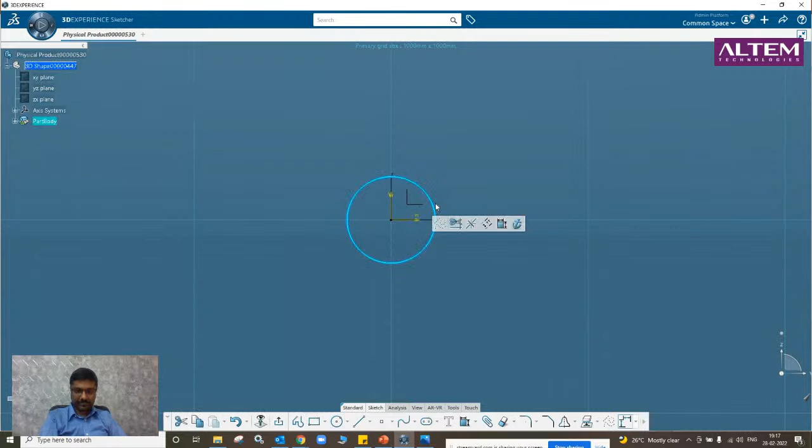Now let us just create a small 1mm circle. If you can see, although I have drawn a circle, it is looking like a hexagon.

Now I will pad it. I will convert it into 3D and pad it by 1mm. And even in the 3D model, it looks more like a hexagon. So how do we change it?

Go to preferences, right arrow mark - don't click on the preferences. Click on that arrow mark here, legacy preferences, and you can go to display performance, and give the value as 0.01.

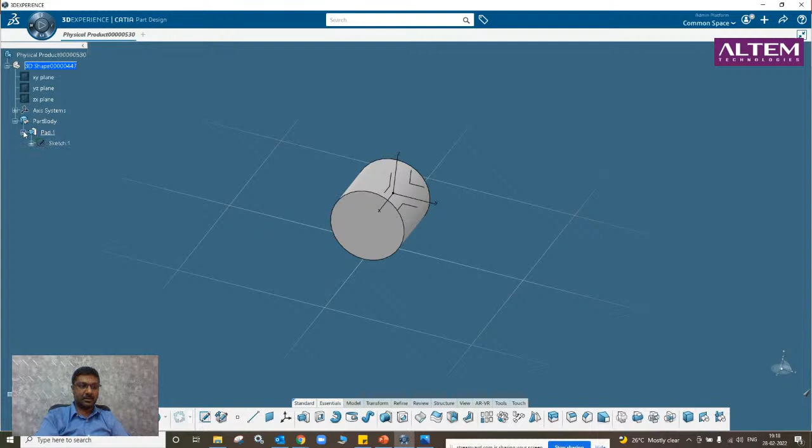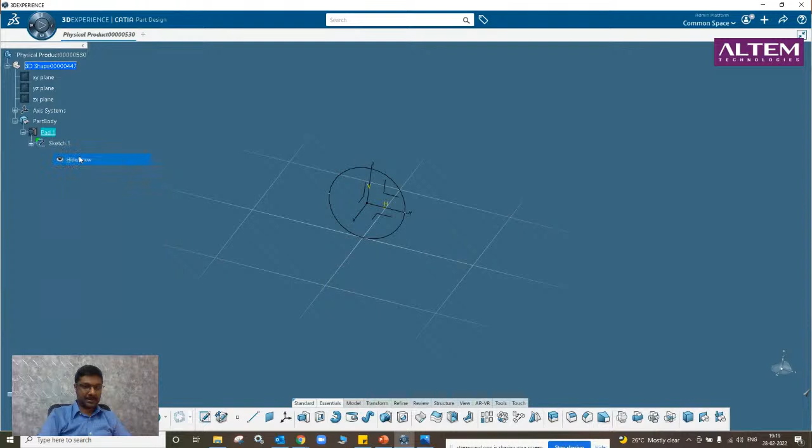Now you can see the circle is looking like a circle, even in 3D. So this is the setting which needs to be done only once - you need not repeatedly do the settings. All the settings will be saved in that particular location. I hope this is clear.

Then for the next settings, we need to go to preferences and go to customize. Here you can move your frequently used favorites design. I am using part design regularly, so what I will do is go to the part design and move it to my favorite section. Then I'll close.

Or else you can drag and drop also - let me drag and drop the part design. So I will open the part design - already it has been opened. Now my part design will be here because this is my favorite apps.

Let me go here, customize. Now let me go to the commands. Let me show you how to create a keyboard shortcut. For example, constraint - let us search for this constraint command.

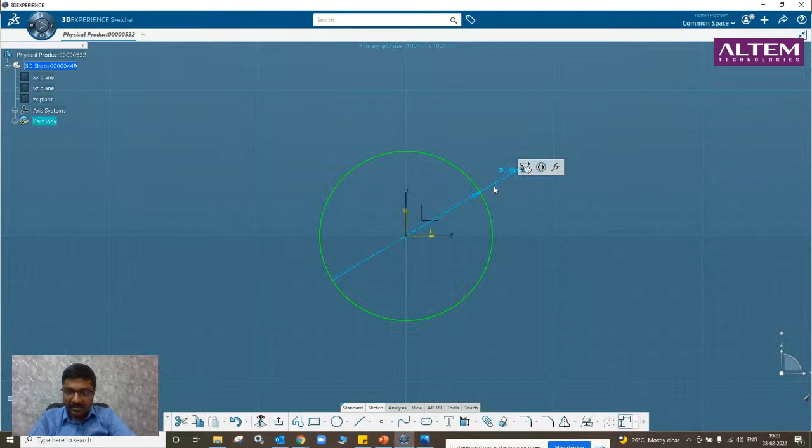I'm not able to find that command. Or maybe I have to open the... just 1 second. Yeah, I have to leave a space here. Maybe if I close the session and open it, you can see that constraint window - this is how you create the shortcut. Maybe if I close the session completely and open it, I think only then it will be visible. So this is how you create a keyboard shortcut.

But there are many other cool things which we can use, which are better than the Windows shortcut. I will share it as the session goes on - you will be able to understand. So whenever we are in the part design, you can check which workbench you are working in. This is the place where you can check which workbench you will be working in.

So without wasting much time, let's get into the sketching workbench today. First you need to click on this positioned sketch. It is there under essentials. Just click on this and you can

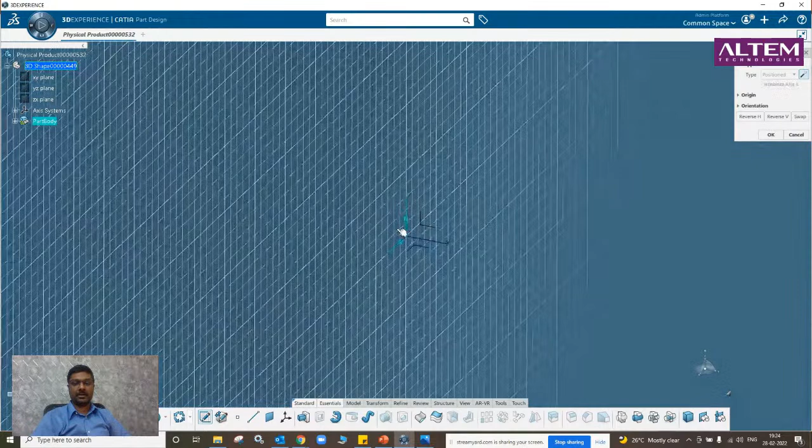choose whichever plane you want, whether you want it the front view, the top view, or the right hand side. Now if I click on the right hand side view, okay,

always we should ensure that vertical is on the top, horizontal is to the right. So just click on this, and it will shift the directions. And then if you want to interchange the directions, like H should become V and V should become H, just click on this swap. So vertical is on the top, horizontal is to the right, and just come out of the sketch. Just left click, and now you are ready to start the modeling.

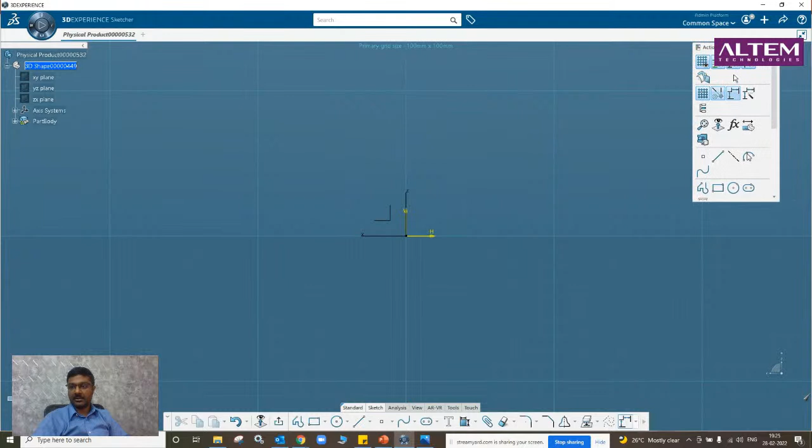Before that, I'd like to show one more nice thing in this. There is something called the action pad. So right click, display action pad. This is like all your commonly used features. You can drag and drop it here, so that you did not search for each and every feature. The commonly used features you can keep here. So just right click on this.

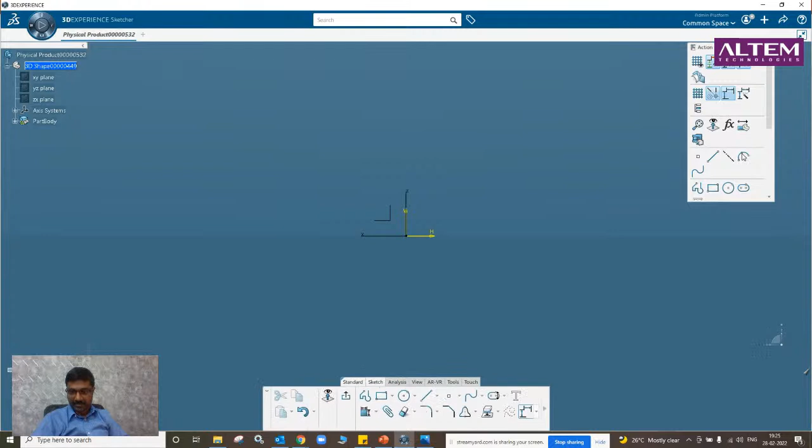Just I will show you how to do it. Right click on this and go to customization mode. You can remove it, or you can say suppose you want to keep it here, you can keep it here. And then right click here and you can exit the customization. So this command, now constraint command, has been put into the action pad.

This is very handy. As I told you, using this action pad and other things which I'm going to show you, it is much better than having a keyboard shortcut. You can work faster. The keyboard shortcut setting is done to accelerate your work, and searching for commands and all of such things can be avoided using these things which are unique to 3D Experience.

And then now, if you want to know what is the name of the feature, right click and you can click on this display icons. Now it is showing it is a rectangle. So if you are new and want to know the name of each feature, you can use this. And once you are experienced enough, or if you are comfortable, you can right click and click on the display icons. That way it becomes very easy.

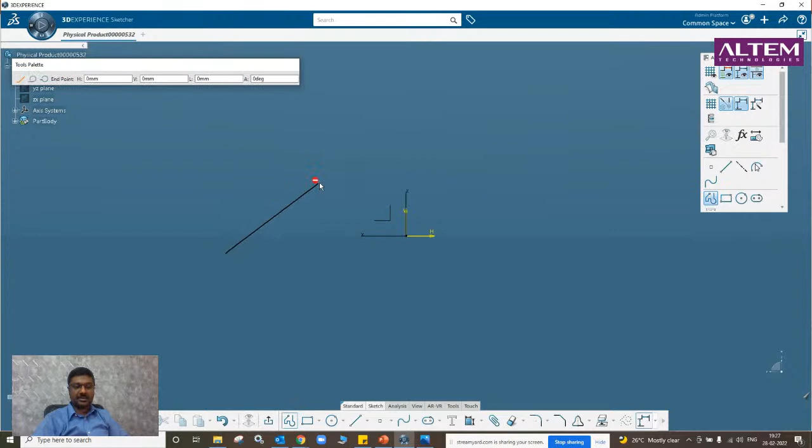Now let us go to the different ways of creating features. First one is the profile. You can just keep clicking on the left hand button, and the profile keeps getting created. And in the end, if you want to close, take it near the endpoint, it will show this close icon, and you can close it. This is the profile, and this is the rectangle with opposite sides, like the diagonal sides, two diagonal edges.

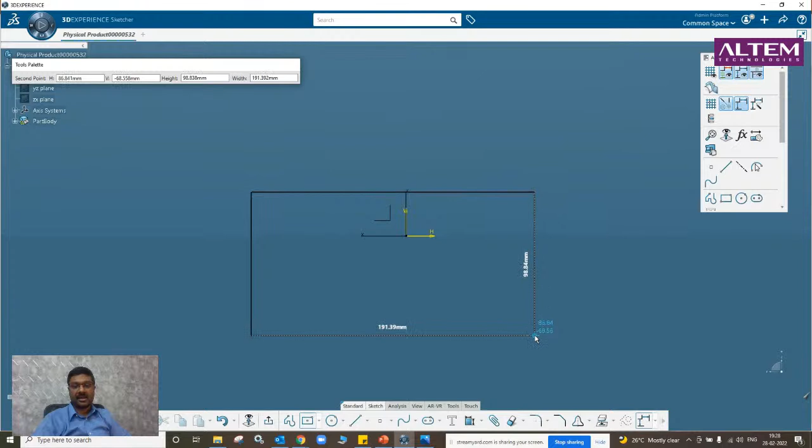If you select, a rectangle is created. Similarly, centered rectangle: just click on this point, that becomes a center, and then you can drag your mouse, and the rectangle is created. Next is the oriented rectangle. Just draw the first line, and then you can move the mouse, so whatever orientation you want, you can get.

Then after this, a parallelogram has been created, and next we'll go to centered parallelogram. I think for this you need a center. We'll explore this later. Next we come to the polygon.

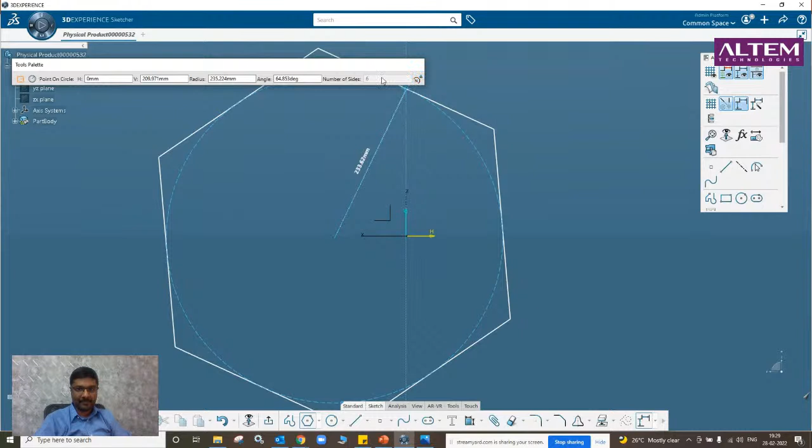By default it will be 6 sides, but you can change it. You can go up to 24 sides. I will create an 8-sided octagon, and this is the octagon. This is how you create a polygon.

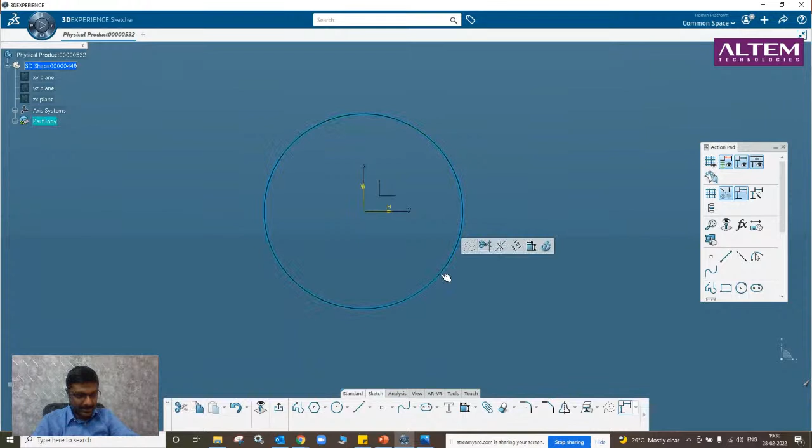Next, we can go to the different types of creating a circle. First one is fairly simple: center, and you can give the radius. After this, you can give a 3-point circle. You can define 3 points on the circumference of the circle, and the circle is created using those 3 points. The circle using coordinates, I think we need to explore that later.

And tritangent circle, I'll draw 3 lines. I will select this tritangent circle: first line, second line, and the third line. So it forms a circle which is tangent to all the 3 lines.

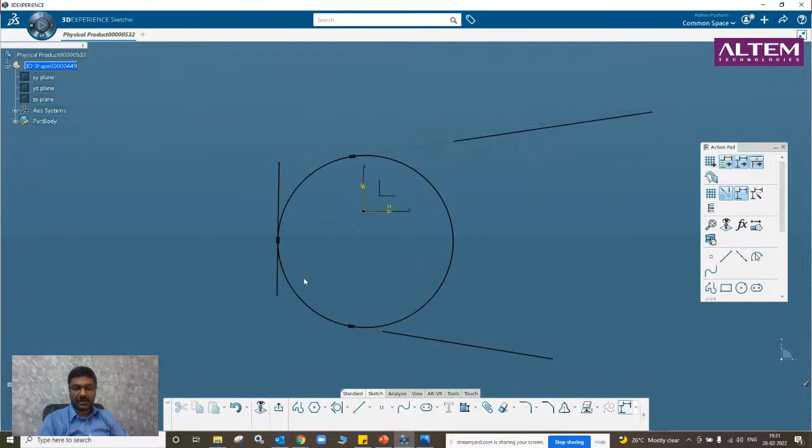Next one is the 3-point arc. This is like first point, second point, and then the third point. This is the way you have to create this. If you use a 3-point arc with limits, then it will be the first point and the last point. These are the two ways how you can create a 3-point arc.

Next one is a simple arc: center point, and one of the points at the circumference of the circle. Then you can drag a percentage of the circle, however much you want to draw, and end it. This is the arc. And this is the ellipse, major diameter and minor diameter. So you can draw an ellipse.

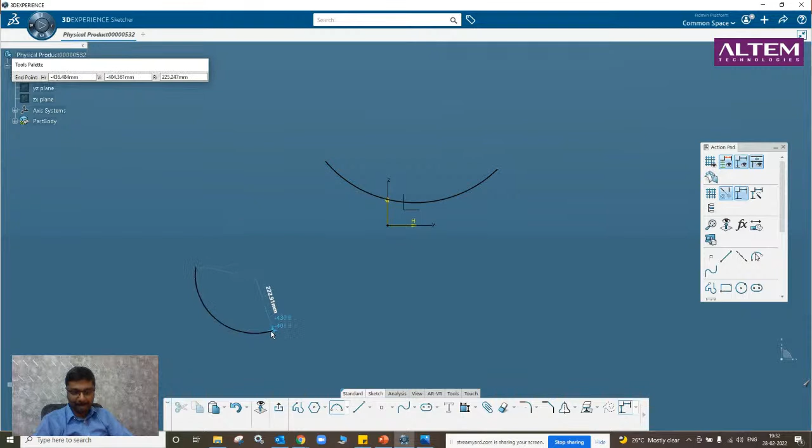Next we will come to this line. Fairly simple, two endpoints and a line is formed. Then you have got infinite line. Then you have got bitangent line. It's very simple. So now this line is tangential with the top curve, and it is also tangential to the bottom curve.

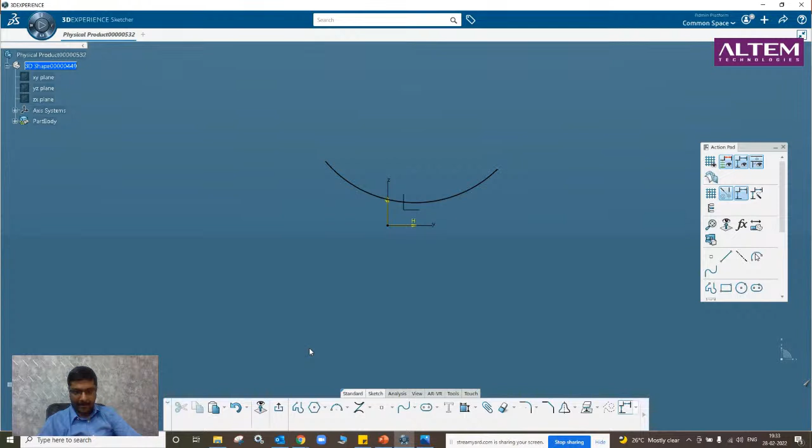Similarly, you can create a bisecting line. Say suppose you have got two lines. Now I will select this bisecting line option, line 1 and line 2. You can see the bisecting line has been created.

Next one is the line normal to the curve. I will take a curve, and I'll select this option of line normal to the curve. You can see this is perpendicular to the curve at that particular point.

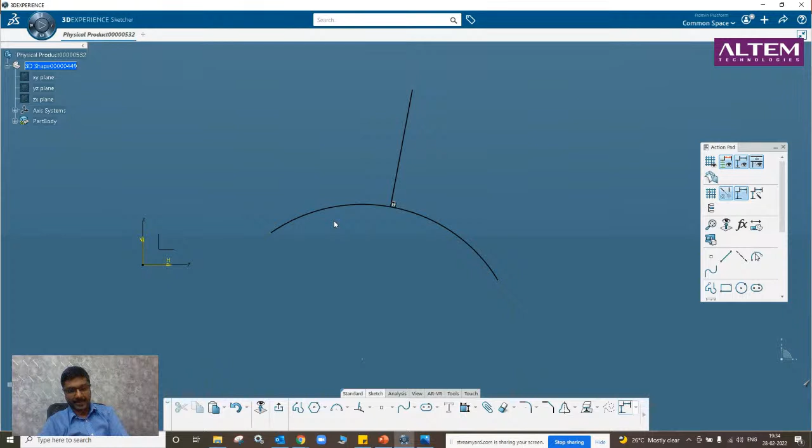The next one is the axis line. Axis line is used as a reference for certain part design commands, which we'll be covering. You'll know the importance of the axis line when we go to the part design.

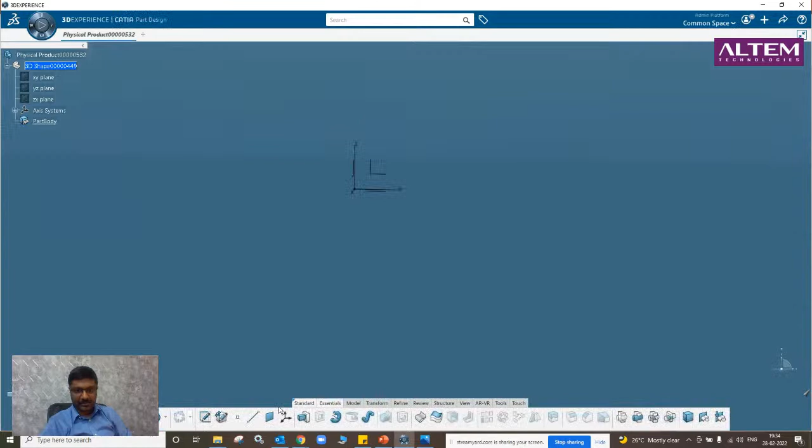Now we'll come out of the sketching design workbench. So the next step is there are three fundamental guidelines of the features. These are like the foundation to the sketching or the design aspect in 2D wireframe: points, planes, and lines. There are different ways to create points, planes, and lines. It is very important for us to know the different ways of how you can create a point, a line, a plane. So this part will be in 3D: creation of 3D points, creation of 3D lines, and creation of 3D planes.

Now if you go under the point, there are multiple methods of how you can create a point. Remember, these are all 3D points. The first one is fairly simple: you want a point at x, y, z coordinates. If you know the coordinates, you can create a point. Suppose say there is a point at x 200, y 100, and z 100. A point will be created. This is the point.

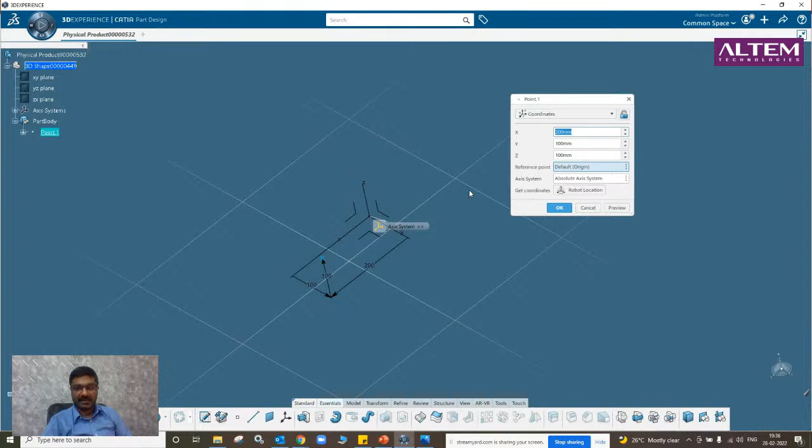If you see the point, and double click on it, you can see this is 200 mm from the x plane, 100 mm from the y plane, and 100 mm from the z plane. So this is fairly simple.

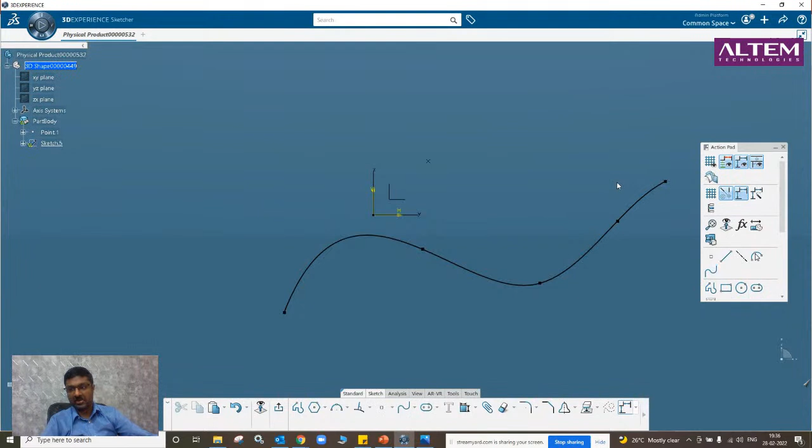The next method of creation of a point is on the curve. So let us create a curve. This is a spline, as you all know. Let me come out of the sketch. Now I want a point on that curve. So you have to go to this point option and create a curve point. Just click on the curve.

Now this is distance on the curve. If you want a point at the center of the curve, just click on this. It allows you to create the curve's middle point. This is the curve's middle point. Or if you want a ratio like 0.25, you can create that. So now the point is created at the center of the curve. Whenever you want to create a point on the curve, you should use this option.

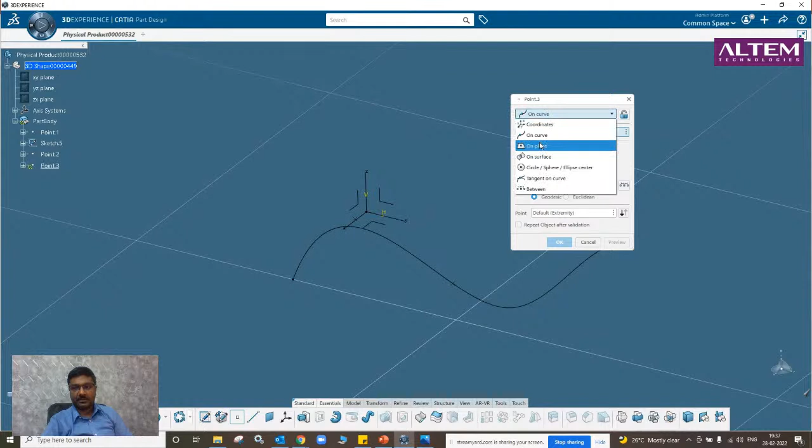The third one is on plane. On plane is nothing but you want to create a point using two coordinates, horizontal and vertical, instead of three, because on a plane one direction is already fixed. So just drag and drop and it will give the H and V value. If you click on it, you can get it.

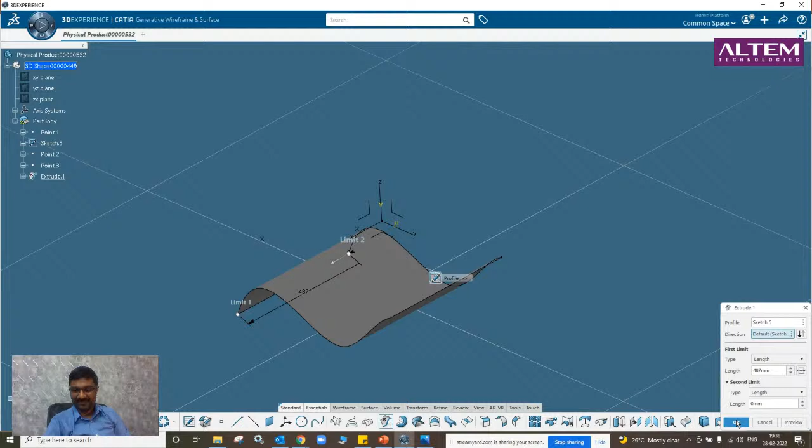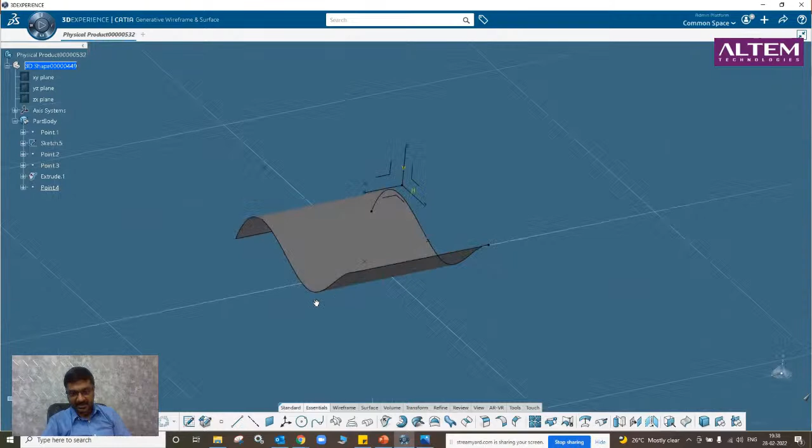And next one is on surface. Now what I will do is go to the surface design workbench, and I will use the same surface to extrude this. Now I want to create a point on this surface, and I will give the distance as 0. Now the point is created exactly at the center of the surface. The point is lying on the surface. So this is how you create a point on the surface.

Let me delete this as of now, and we will cover more on surface design when we are covering the surface design workbench. Now, suppose there is already a circle, I will pad this.

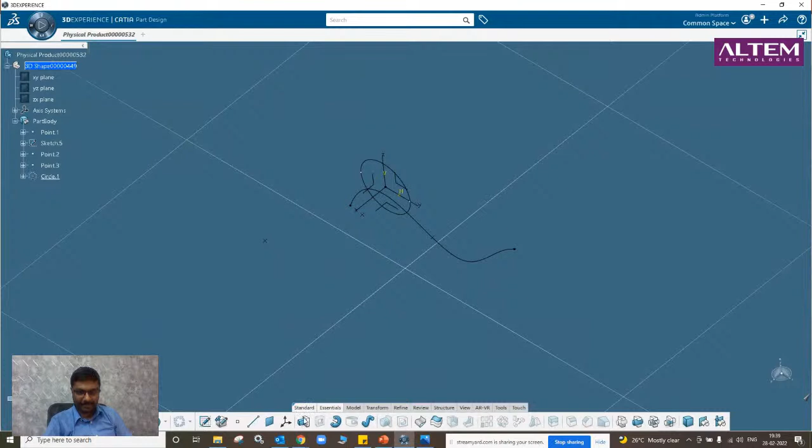And now I want a point exactly at the center of this circle. So what I will do, I'll go on this point, click on circle, and click on this circle. You can get a point exactly at the center of the circle.

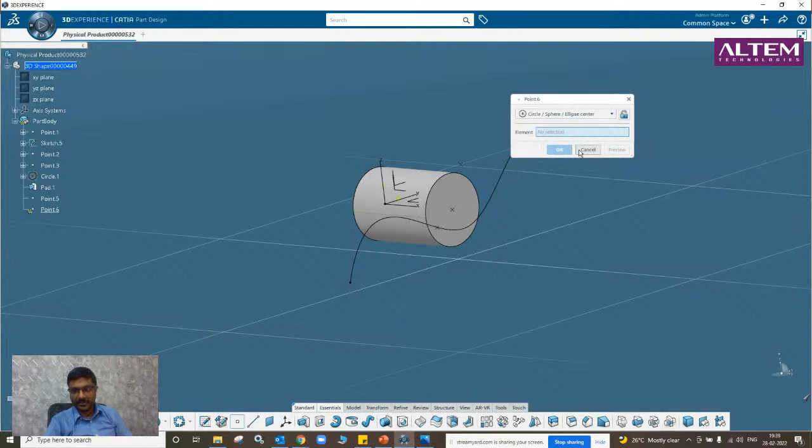In similar manner, we will go to tangent on the curve. This is not very popularly used, it's like one of the rare times you'll use it. I'll take the example of the same curve. I'll click on tangent on curve, select the curve and select this y-axis, tangent direction.

If you click on that, you can see there are two points which have been created, that is, the y-axis is passing tangent to the curve at those 2 points. Now it will ask me whether I want to keep the two sub-elements. I'll keep all the sub-elements, and now there are 2 points which have been found.

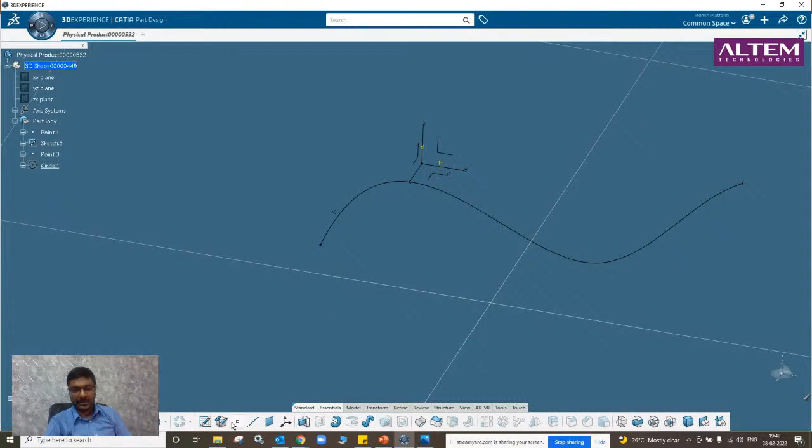And then the last one is in between. So there are 2 points which are here, and I want a point in between these 2 points. I will go between point 1 and point 2. You can create it at the center or whatever ratio is the requirement, and you give OK.

Remember, all this is in 3D, it is not in 2D.

Now let us go to the different options of creating lines. The points, different ways of creating points, is done. Now let us go to the lines. So the first one is fairly simple, point to point. First point, second point, a line is created.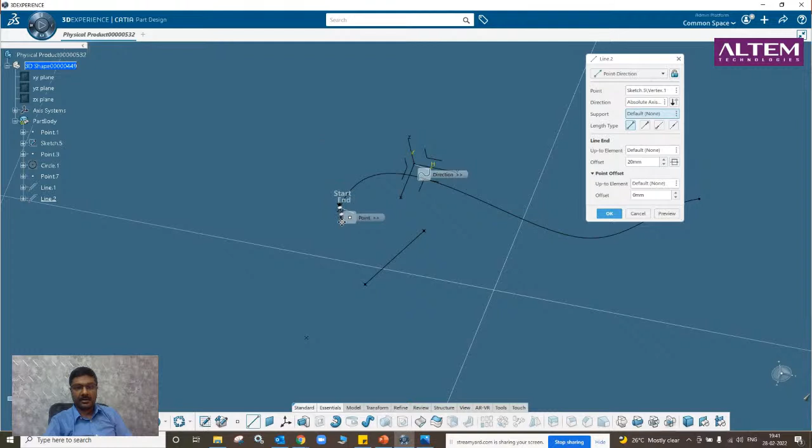Whenever we are going to the second one, point and direction, I will select the point and give the direction. And you can select to increase the length, to maintain the direction, but you will have control over the length.

And next one is angle normal to the curve. I need a point for that, so I'll create a point on the curve, and give angle normal to the curve. So this is the curve and this is the point, and you can give the angle, whatever angle you want.

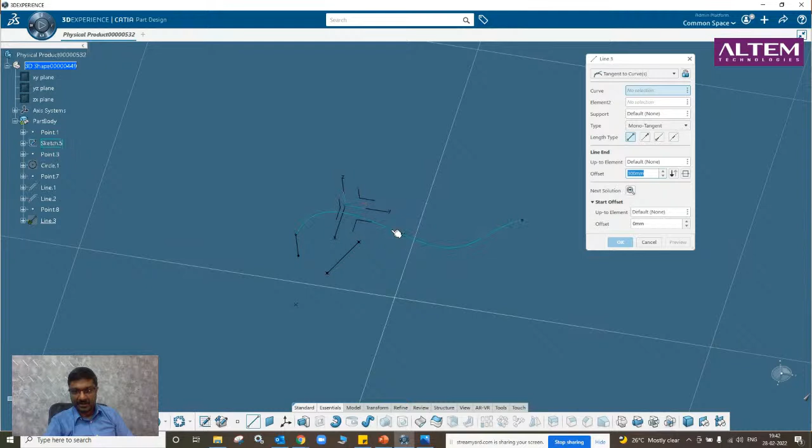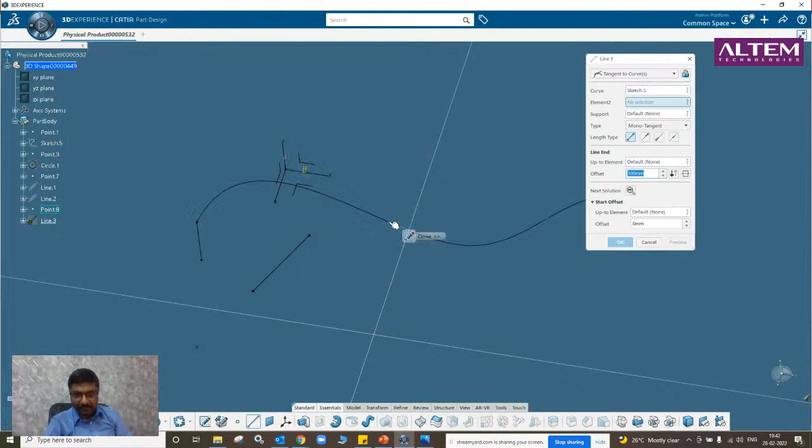So this is angle normal to the curve, and the next one is tangent to the curve. It's a similar option, curve and a point, and the line is tangent to the curve at that particular point. I hope this is clear.

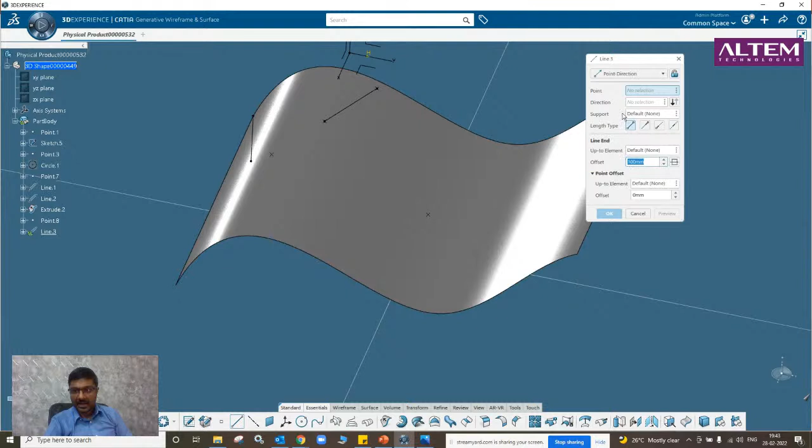So next one will be normal to the surface. Let me go to generative wireframe and surface, and let me extrude this. Let me create a point on the surface, and I wanted the center, so the distance is 0. Let me go to the line, and let me go to normal to the surface and point.

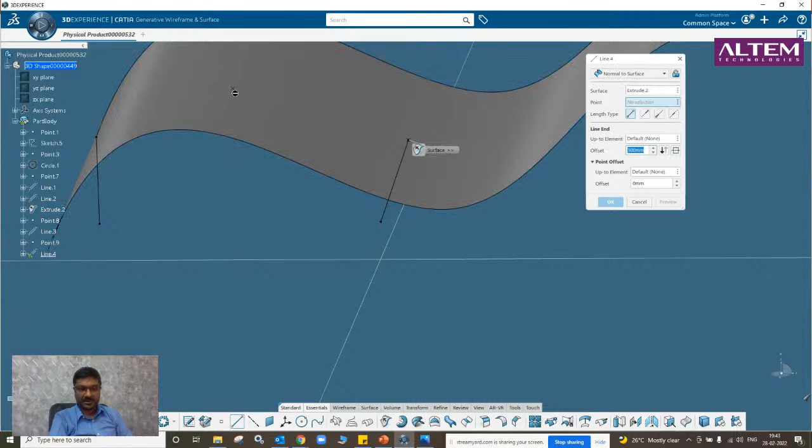It will be normal to the surface at that particular point. So suppose I create a point here, line, normal to surface at the point. Okay, so let me delete this, we don't need it as of now.

Just let me go to the part design workbench, and the last option is bisecting.

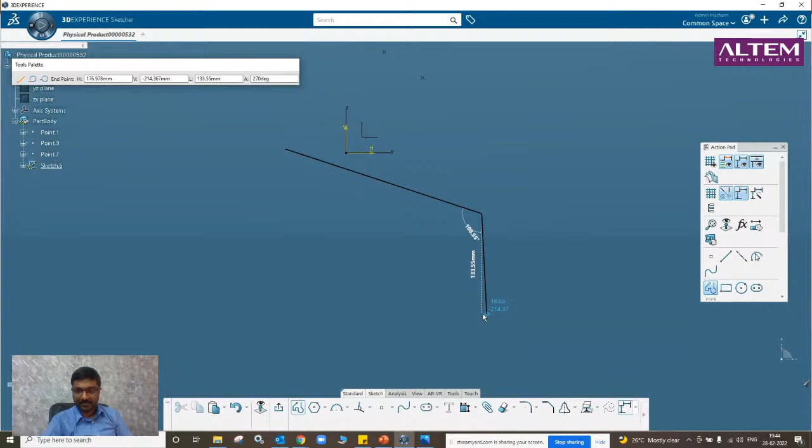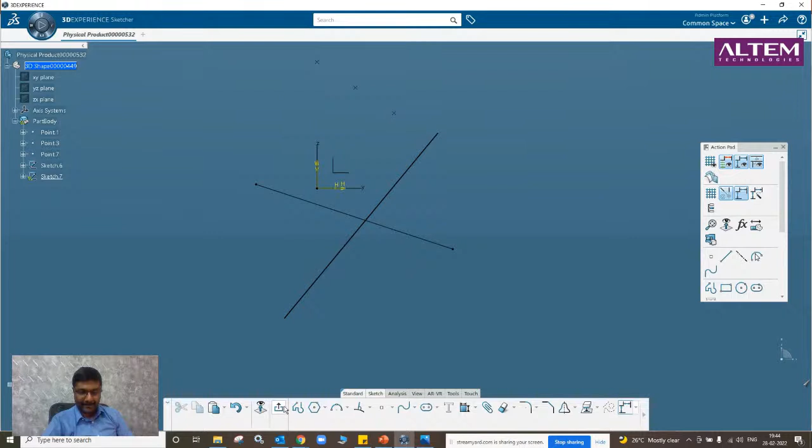Let me create a sketch one. Come out with the sketch. Let me go to one more sketch, and let me draw one more line. Now I want to create a line just bisecting these two lines, line 1 and line 2. See, a line is created at the bisection point of those two lines.

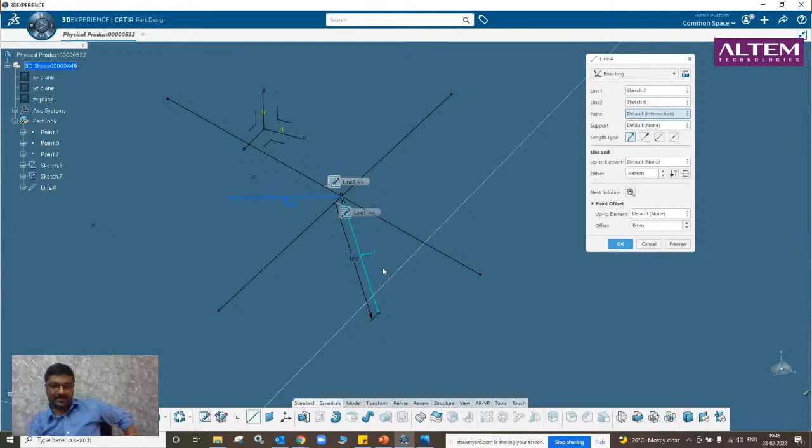Now let us quickly, without wasting much time, create different ways of creating planes. This is also very important.

So the first option is offset from the plane. Already you are having an existing plane, you want to create one more plane, offset. Whatever existing plane, just create an offset plane at a certain distance.

The second option is parallel through point. For example, you're having any point, and you want a plane at that particular point. You can create it, it is asking for the reference. You want the ZX plane to be replicated on that point. The plane is created as a ZX plane.

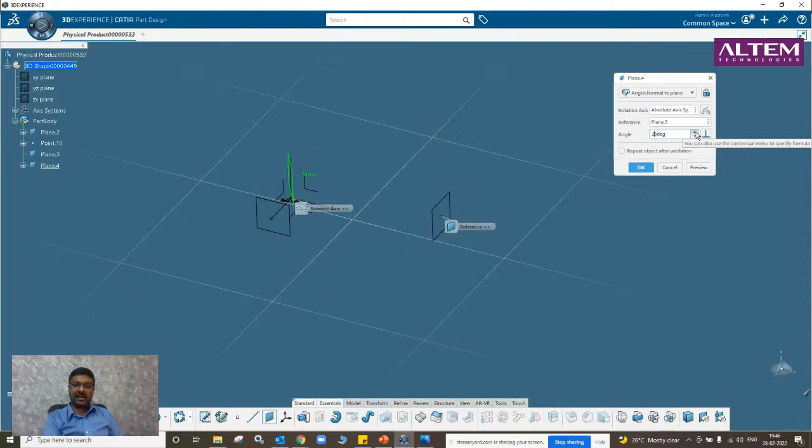And angle normal to the plane. So what I will do, I'll give Z as the rotation axis, give reference axis as this, and you can move the angle. This is to create angle normal to the plane, and you can create at any angle.

Next option will be through 3 points. You must remember that it's like a tripod.

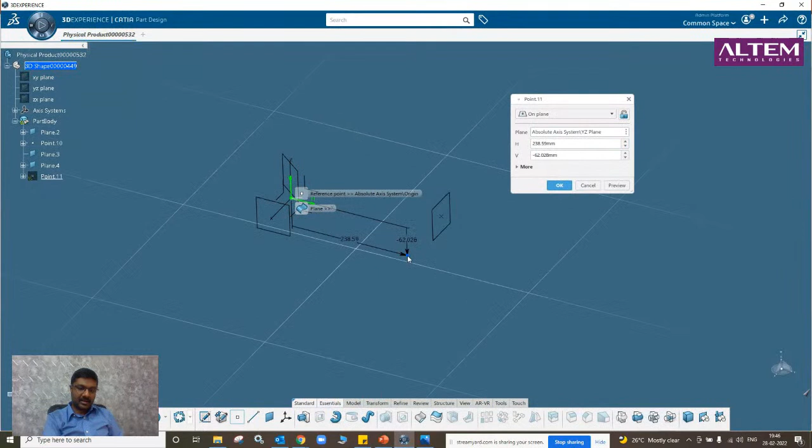This plane is like a tripod. For a tripod to stand stable on the ground, you need 3 points. You cannot have 2 points or two legs. At minimum, 3 legs are required for an object to be stable on the ground.

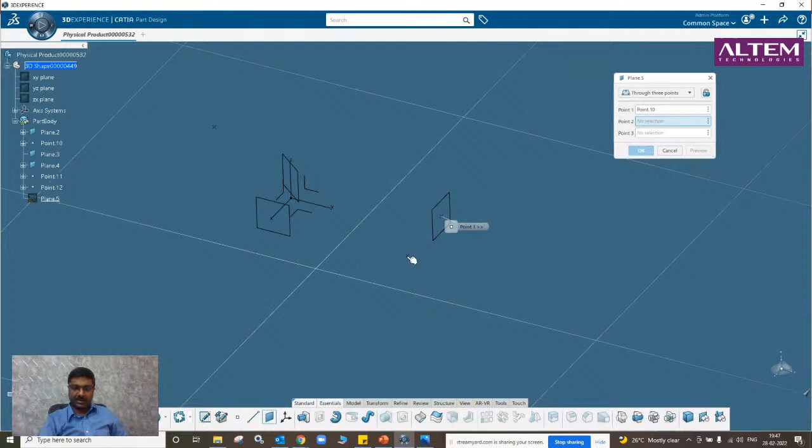Similarly, for any plane, there are 3 points, which is the bare minimum requirement for a plane as an input. With 3 points only, a plane can be created. So what I will do is select the 3 points and give input as 3 points. The point will be created, and the plane will be created on the first point which you select, but it will be passing through point 2 and point 3. Remember, this is a 3D plane we are talking about.

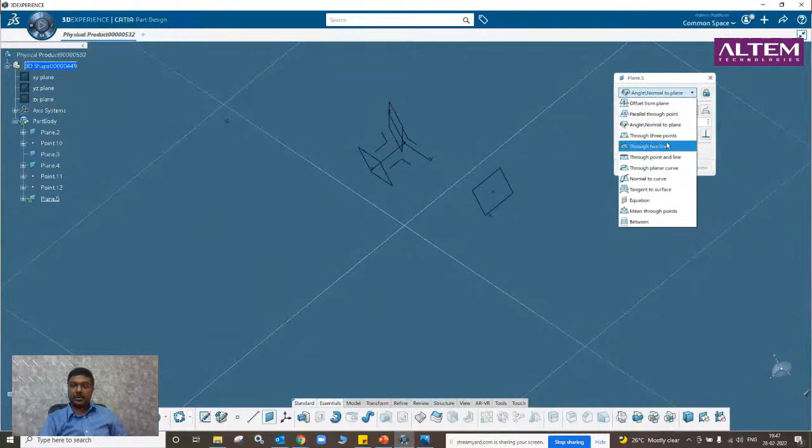Then the next option is through two lines. Similarly, instead of input of 3 points, it can be two lines. So what I will do is create with two lines. The plane will be created on line 1, taking the orientation of line 2.

Okay, and the next method of creating planes is a point and a line. So we need to have a point and we need to have a line.

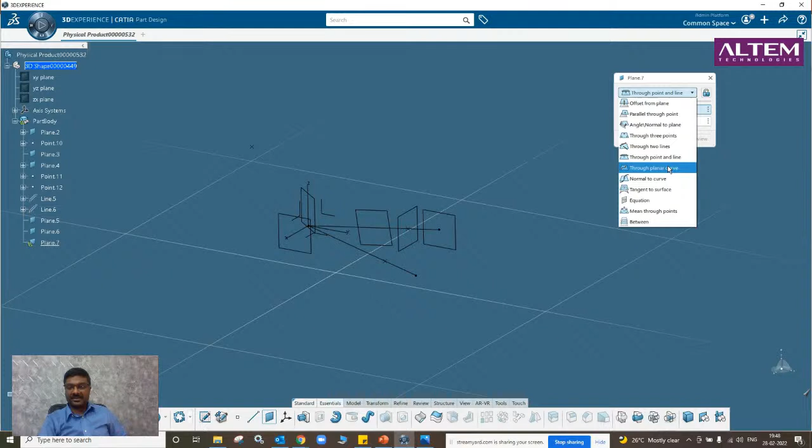And the next method of creation is the planar curve. This is not very important, let's skip this for the moment. Let me delete all of this, close this, and open a new session.

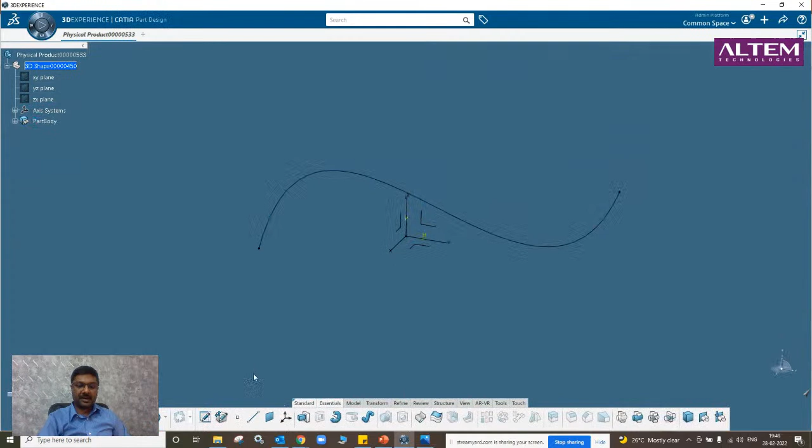Let me create a point on the curve. Now we can create a plane which is normal to the curve at a particular point. Select first the curve, then select the point. So now this plane is perpendicular, or normal, to the curve at that given point.

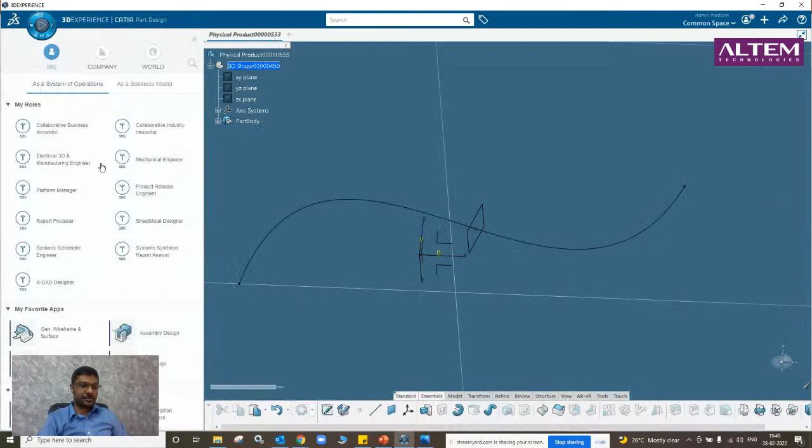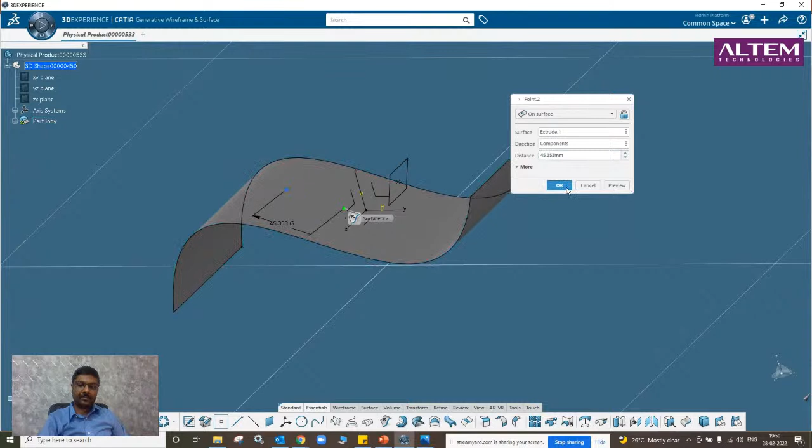Next is tangent to a surface. I will extrude this, then create a point on the surface. Then I will go here and select the option of tangent to the surface and a point. So the plane is created tangential to the surface at that particular point.

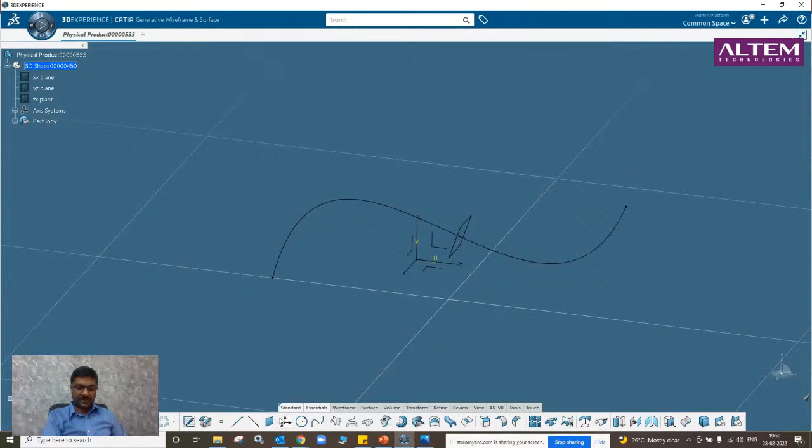Let me delete this. Let us go through the equation and mean through points - we'll skip for now. So let us go to the last option, that is 'in between'. This is a very good and very important option, so let me go through that.

For 'in between', I'll select this ZY plane and the ZX plane. Now if I give it 0.5, this is 45 degrees in between. As you keep changing the ratio, as I keep reducing it, it will try to match the ZY plane. If I give it 1, it will be the ZX plane. So if I want an in-between orientation, I can take it as 0.5, it will be 45 degrees. This is how the in-between plane works.

Now we have gone through different ways of creating points, lines, and different ways of creating planes. So these are all the things which we saw in 3D. Now I think, for better understanding of all the features, let us go through some sketching examples. Just give me 2 minutes.

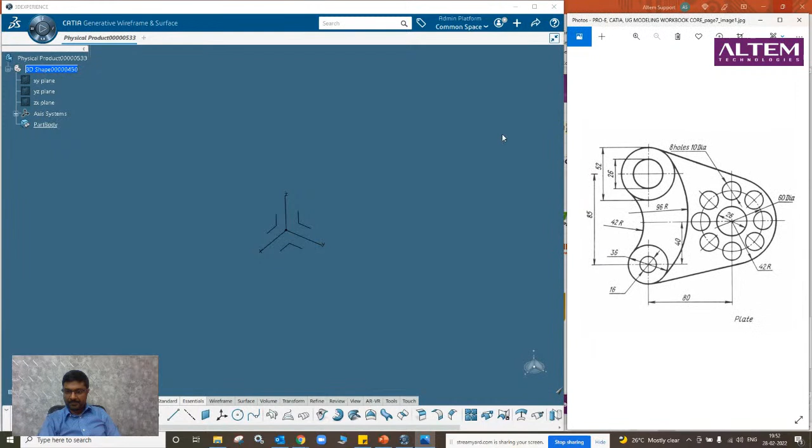I hope this screen is visible to you. Okay, so we will try to do the sketching on the ZY plane. For the moment, I will minimize this action pad. So first let us draw this 26 dia circle. Let us take it as our center.

I'll draw a circle. Now instead of going here and doing everything, I'll just click on this circle. It will give you the possible options. Now what are we trying to do here? We're trying to get the dimension, so it will give you the constraint. Just go here and we can give 26. Okay, now that is done.

Now let me draw one more construction circle, that is of 60 dia, and let me take this as a construction element. Now let me draw one more arc which is of 42 radius.

Let me just draw this now. Later on we can edit it however you want, but the length is 42.

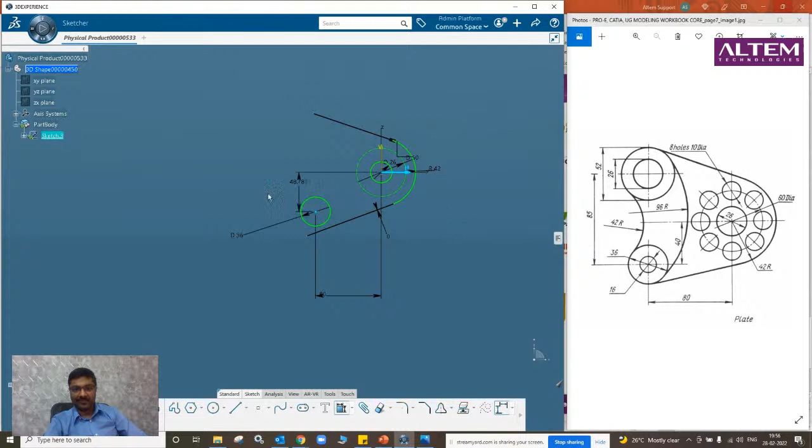Now what I will draw - I will draw one more circle, and I will give the direction of the dimensions. So it is 80 mm from the vertical. What is the circle diameter? It is 36. And I'll fix the vertical dimension as well - vertical dimension is 40. I'll select this circle and right click, value tangents.

Now this is proper. Now I will draw the upper circle also, of diameter 52, which is lying at the same point.

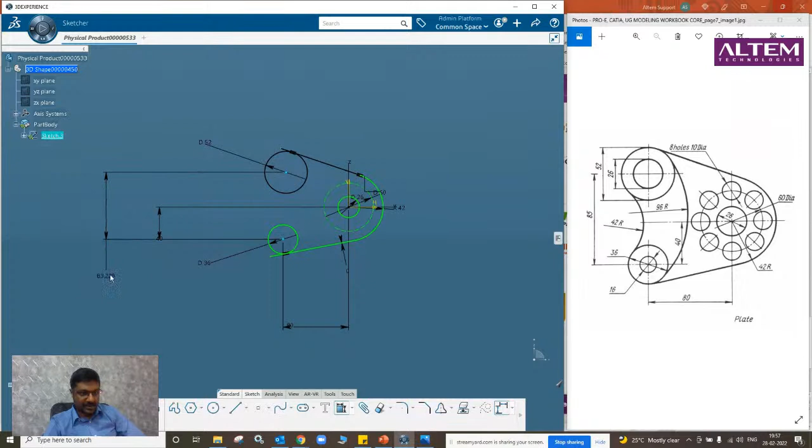Yes, 52. Now I'll select this line, I'll select this circle, I'll click on the constraint, right click, value tangents. Now the distance between the two circles is 85. Select these two points.

Right click, vertical measure, and I'll give this as 85. Now still this is moving, so this one and this one. Horizontal measure is 0, or this is fixed. I will draw one more circle which is 26.

Now I will have to draw an arc which is passing between these two, which is of 96. So what I will do, I will take an arc, just a random arc, and if I just try to move this arc, it will try to constrain with every possible line or the circles. So I will hold shift and then move.

And I will fix this. Okay, this looks to be like 0. And I will take these two and make it tangency, this one and this one. Wait a minute, tangency, it is not allowing. Maybe this is not proper.

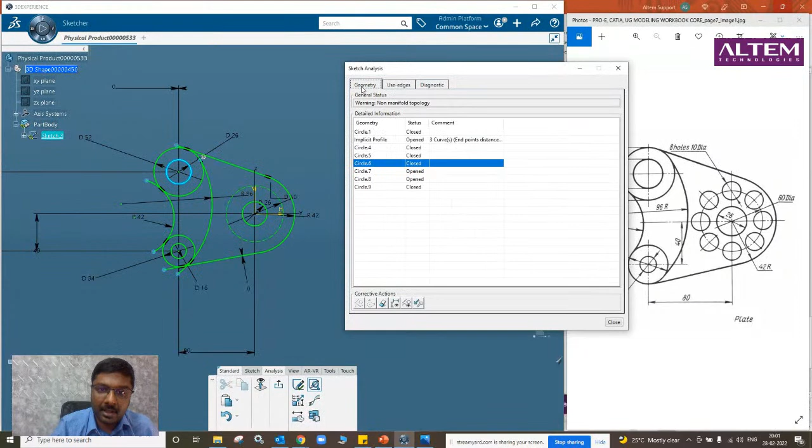Go to the analysis, or there is something called a sketch analysis. In the analysis, go to sketch analysis, and now you can see, okay, all these things are undefined. This circle is open, this circle is open. So how do we close this and how do we check it?

For this there are useful commands which I'm going to show you now. Just a minute. Oh, this is the thing. Sorry, so there is something called quick trim and trim. Let us see what is the difference.

Quick trim is nothing but, now as you can see, this is extra. I'll just click on this and, like an eraser, whatever is extra is getting removed.

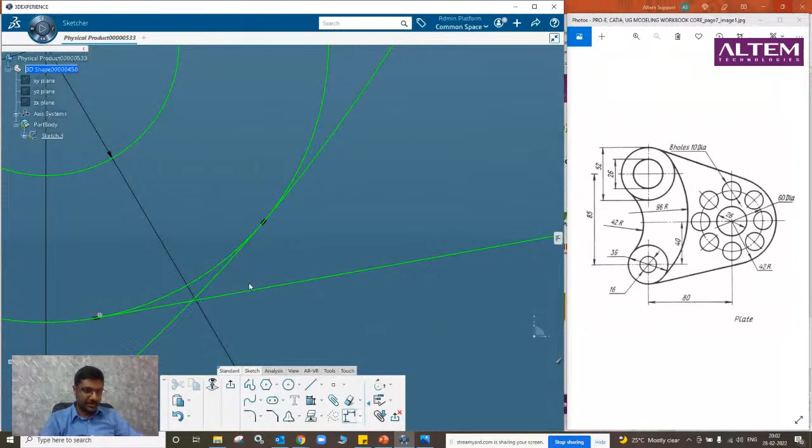Now we had to do the trim twice. We have to trim this and trim this, or else there is something called trim. So just select this and select this. But so this is how you must... now this is correct. In the similar way, either you can use trim or quick trim.

Now I think everything is clear, but this cannot be converted into 3D, because this is not closed. This is not implicit profile. This is not a closed profile. We have to delete these two to get it.

Okay, forget it, now we are trying to work in the sketcher design profile. Let's concentrate on this. Now we need to draw 6 more circles, or sorry, there are 8 holes. What is the diameter of each hole? It is 10 diameter. I'll create one circle which is 90 degrees to this.

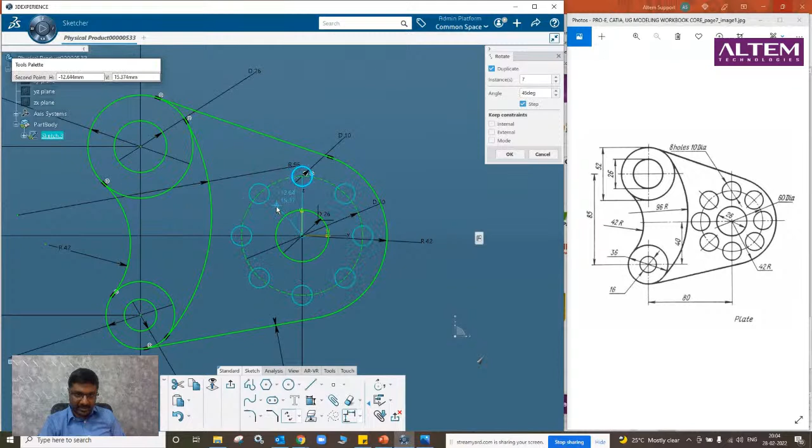And I will select as 10. Now I need not draw 8 individual circles. I can draw this one circle and do a circular pattern. There is something called rotate, and there is something called duplicate. You need 7 instances, I'll click on 7, and I will select the first point and the second point, and just move. They are created.

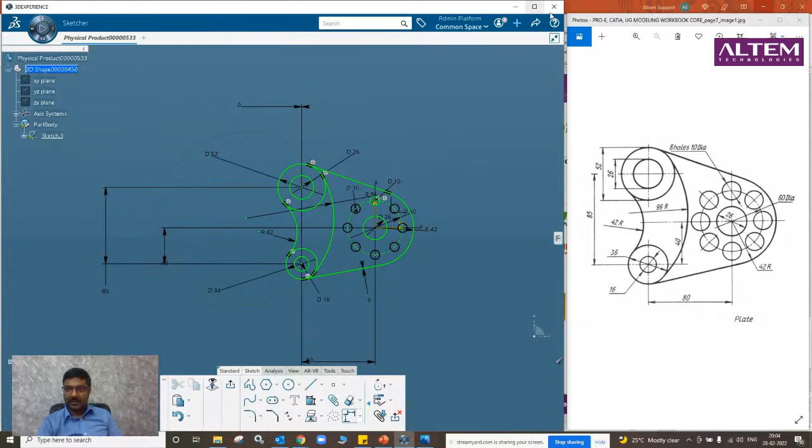But unfortunately, it won't be auto constrained. So you have to give diameter to each of it to constrain, or you have to constrain with H and V when you are using the translation. All this mirror, scale, rotational, all these commands - if you are using them, it won't get constrained automatically. You need to again constrain it individually. This is one of the examples. Let me go through one more example very quickly.

Okay, so let us get into the sketcher design workbench. We minimize the action pad for as of now. So for creation of the bottom part, I will use a command called cylindrical elongated hole.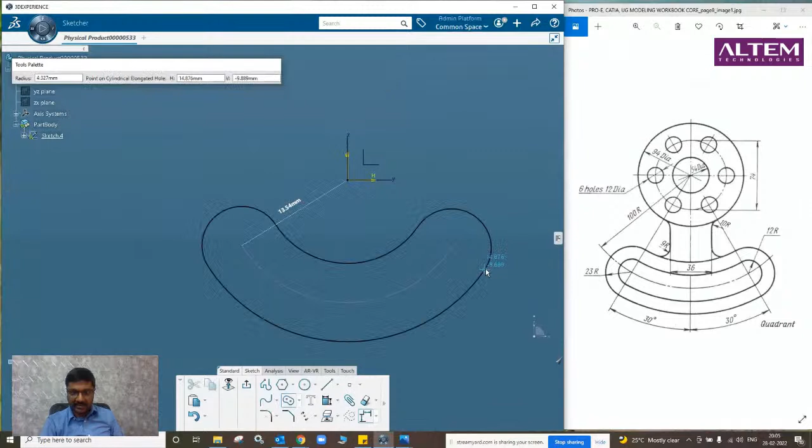I will select the center point, two ends of the arc, and then move my mouse. The arc is 12, so I'll give dimension as 12. Now it has turned into green because I've already constrained this. Now the next one, it is 23R. I'm sorry, this is 23R.

And the inner one, this is 100R. I'm sorry, this is 100. And this one is 23.

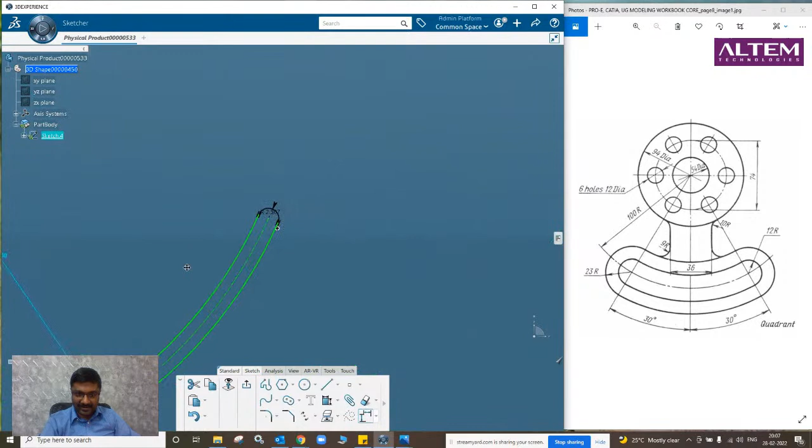This is 23, and there is one more keyhole profile which is of 12R. So what I will do, I'll take one more keyhole with the same dimensions, and this one I will give as 12.

And I will add two lines, and this angle is given as 30 degrees.

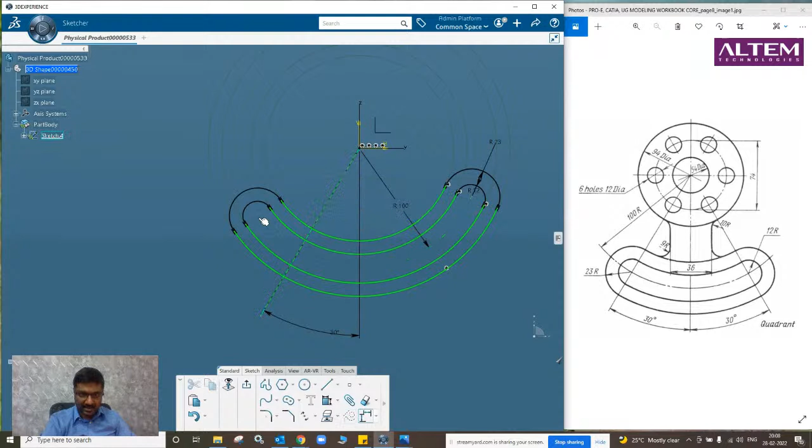I will have to first make this line as a construction line, and give this distance as constraint. Similarly, instead of drawing one line, I'll mirror this line, as you can see it is trying to. So what I will do is mirror this.

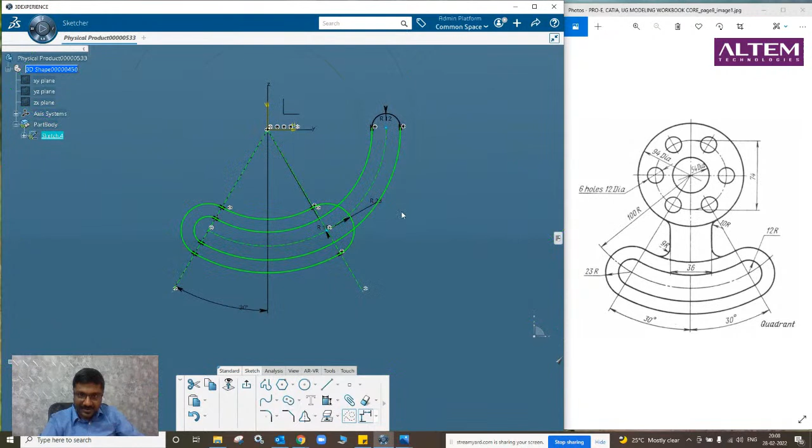Just going to this, and I will give constraints. This and this constraints. Okay, this is how I draw the bottom part of this.

Then I will just go on to the top one. The diameter of this is 94 dia. The inside circle is 54 dia. And there is a 74 dia circle.

I will make this as construction, and I will draw one circle of 12 dia.

And now I will rotate this. I need six or five more instances, and center, center, and there you go.

That's it, and you need one more line. The distance between the two lines is 36. So randomly I will draw one line, press shift, and draw a line. Make this line as vertical, and I will mirror this line. Now I'll get the distance as 36.

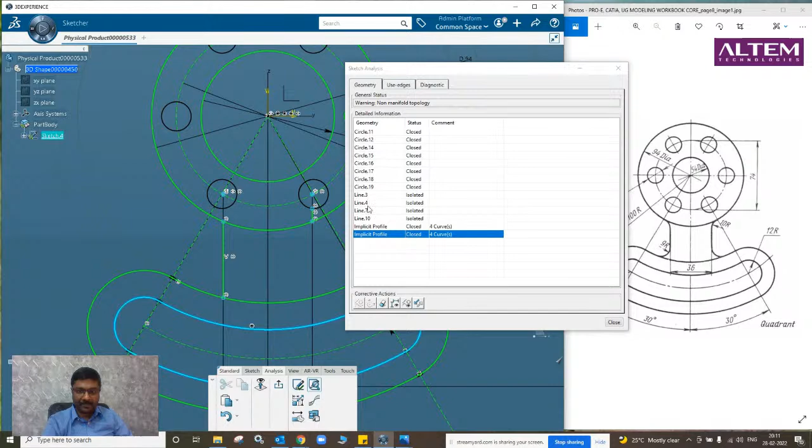I will show you where it will reflect. Now if you go for sketch analysis, it is showing that there are two lines which are isolated. So this is how you can find out if there are any unnecessary lines or points.

Sorry, something is wrong. Let me mirror this line. And distance between this line is 36.

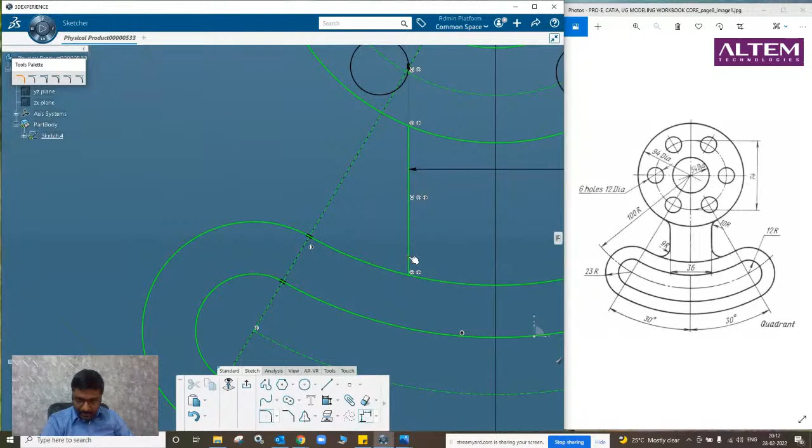And now I have to give the 9R and the 10R. So what I will do, there is something called as corner - just select the two ends and give it as 9. That is how you give the radius. If you want to give this one as 10R, just select this and give it as 10.

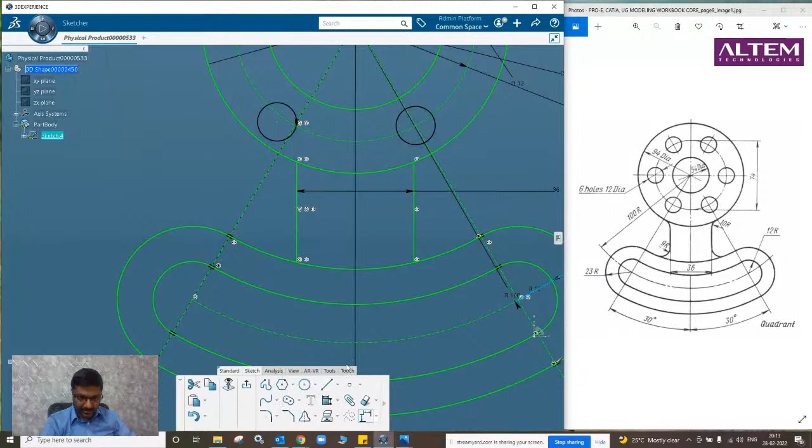Or if you want to retain this, we need to draw a 3-point arc. And you have to make it tangential, and remove the trim, and do all of those things to complete this sketching. I hope I have covered all the aspects here.

And say suppose I want to go to more detail in some other features. If I go to this sketch, and draw a 50 mm, I can easily scale it here. Just click on this and go to the center.

You can see you can increase, you can scale it up. I want 1:2 scale, just click on 2. And now if you see the diameter of this, it will be 100. So this is how you can scale it also.

So there are other options like keyhole profile. Just select the axis, first circle and the second circle. Quickly you can create a keyhole.

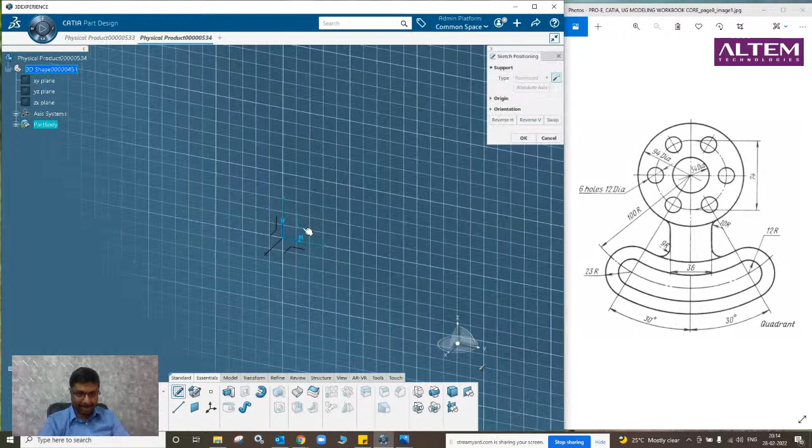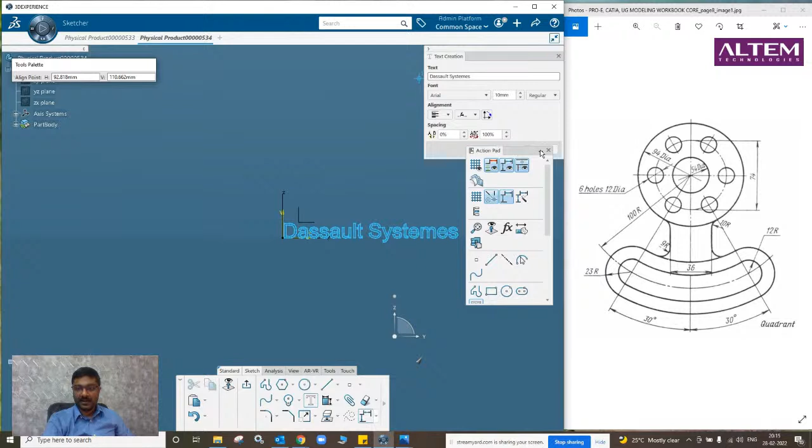And in 3D experience, there is an option where you can create the text very easily. You can just type your text here, give the font, size, italic, bold, everything, and then click on OK, and it will create the sketch for you, and you can come out of the sketch and add it. So creation of text is very easy in this 3D Experience platform software.

Even that option is directly available here. I hope this session was useful for you. I've explained all the things related to sketching, and you guys can explore the software further to gain more knowledge.